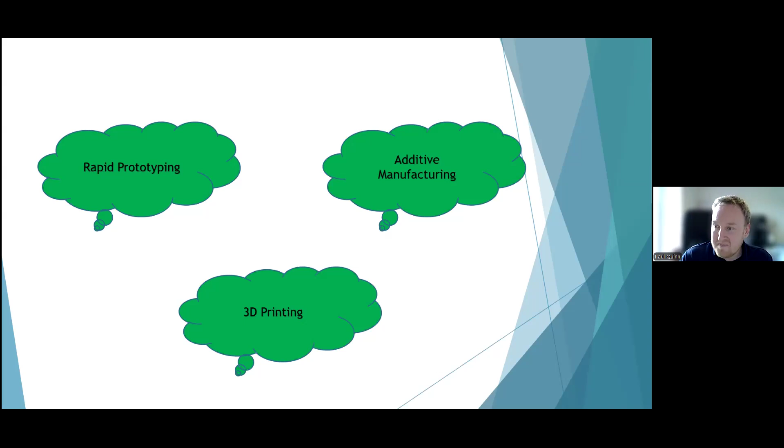I recently did a course on digital education using different tools, and I asked a few different AIs to come up with an image that describes those three things and how they intersect and come across. I thought it was quite fun to put into the presentation today.

So you can see a rapid prototype there - it was all about speed of iteration, getting designs out quickly, having people talk about designs and changing over and over again, generally low volume testing, form, fit, function, that sort of stuff.

3D printing then - were prototyping tools, and these were the tools that we were actually going about. And then our additive manufacturing generally was our industrial side of stuff, so big industry using it, or we have production lines, or we have production facilities ready to roll and bring forward.

Over the last few years, particularly in the last 5 or 6 years, there's been a massive boom. The likes of COVID and stuff like that really opened up the space and people got more interested.

I have students now that come into me in first year, day one, and they're going, oh, I have a 3D printer. And you're kind of like, okay, well, we're not covering that now for a while, but yeah, that's brilliant. So they're already thinking about it, they're already involved, they're already being aware of this sort of stuff. It's a really big benefit to most people, especially getting them to think in an engineering mindset.

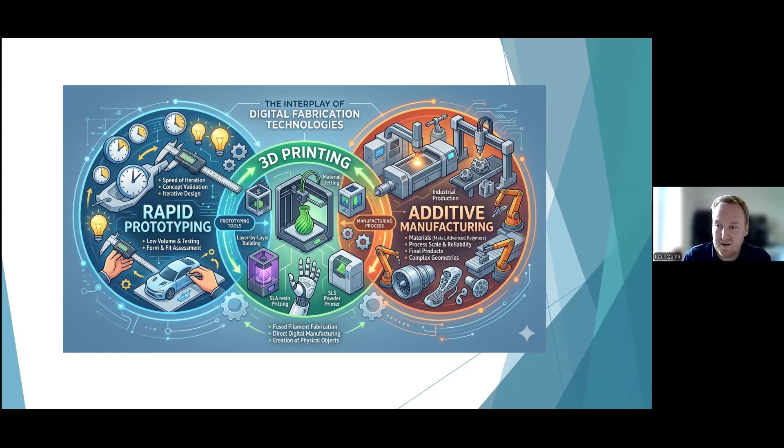So what is additive manufacturing? It's a manufacturing process that creates 3D objects by depositing materials such as polymers, metals, ceramics, layer by layer, based on our digital CAD models.

We take the CAD model, we break it down into slices or chunks, we then put that into a machine, it interprets those chunks, and then produces our object. We currently have 7 different process categories, with different processes within each of those categories, and we have a large range of materials from polymers, metals, and ceramics.

In my last role, it became a bit of a joke that I kept saying materials unlock our applications. As we look to get more and more applications for this technology, we need to have a material suite that follows with that as well.

It's all well and good me going after a certain application, a bracket, or whatever the case may be, but if I don't have the material there to actually produce or make that part, it's no good to me at all. So it becomes really important.

We're seeing with our process technologies - whether it's FDM, SLA, or SLS - generally the technology is improving in small increments, but our material space is blowing up massively. That's where we're starting to see the big benefits now, in terms of people going, well, now I have a material that I can compare with.

Generally, the phrase that the process leverages design freedom to create traditionally difficult to manufacture parts is thrown out there. So parts that our traditional manufacturing process - injection molding or subtractive machining - maybe had constraints with, or we couldn't produce all the features, additive tends to allow us to unlock them a little bit more.

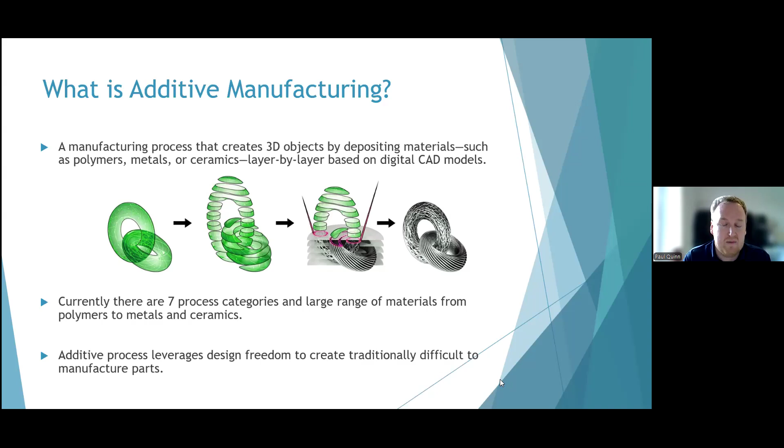So this is our additive process, generally referred to as having 5 steps. We have a CAD file that comes out of SolidWorks, Fusion, Siemens NX, or whatever CAD software you're using. We produce a mesh file that passes into our machine software where we assign our parameters - temperatures, laser power, layer heights, all these settings, similar to running a CNC machine where you'd put in feeds and speeds. We then pass this machine-ready file off to our machine and it prints.

For the first 10 minutes, we're fixated on it and we watch it. After a couple of years, that fixation becomes a little boring, but it's still nice to see at the start. What you can guarantee is the second you walk away is when something will go wrong. But anyway, that's by the by for the process.

And then we get our final part. What a lot of people don't talk about is the post-processing that's required. When you look to buy one of these technologies, no one will ever talk about this - the part comes off the machine and you have to do all this stuff. What they normally say is the part comes off the machine and off you go, you're good. But that's a bit of a scam, let's say. Every 3D printed part that comes off will need some form of post-processing. It's important that we own up to that, especially when companies or industries are looking to adopt it.

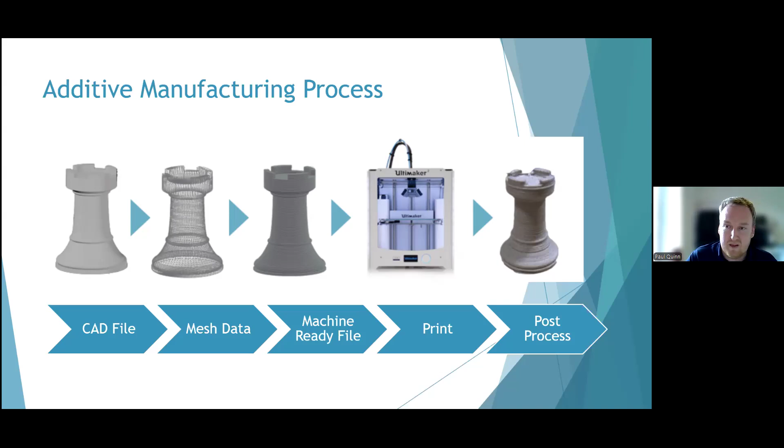Design freedom - a very, very dangerous statement, because once you say this, people go off and design all these weird and wonderful things, and they come back and say 'I'd like to print this,' and you have to say 'actually, no, I can't do that in that way, I have to look at it this way, or change things around a little bit.' I see it with my students every day. They come up with fantastic stuff, and then 'oh, well, we can't print that, or we have to do this to get it to print.'

So we certainly have a lot more freedom compared to how we would traditionally design. We're able to use more complex geometries, do stuff like part consolidation, where we take an assembly and minimize or reduce the number of parts in that whole assembly, integrating functions in certain components. We can look at lightweighting - we can put material exactly where it's needed, and use different tools to help us get a little bit more out of the technology.

So we're starting to see more benefit over just machining - if I 3D printed it in this way, I'd be able to reduce my material use by a certain amount and see the benefits there as well. We can use conformal cooling for injection molding tools to get higher output and throughput, having cooling channels that run very close to the mold surfaces. One of the big benefits is we can start to move towards mass customization - instead of purchasing something in a small, medium, or large, you could get something customized exactly to you. Certain industries have been doing this for a long time.

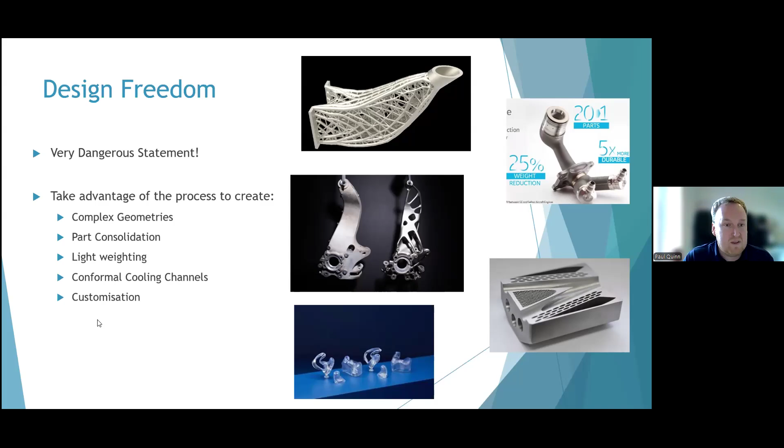So that's where we're starting to hopefully move. There's all sorts of issues we can talk about and explain, but that's where we're starting to see the technology grow and push forwards.

When I was in my previous role, doing consultancy on this sort of stuff, I'm looking at it from the point of view of when we're designing components or looking at a part that might suit being additively manufactured, we tend to put them into three brackets.

So the only real freedom we have there is the process we use. We can maybe change to a different process, moving away from one additive process to another. We don't like to make many of these because we're not really using the technology for what it's there for. It was already manufactured the traditional way, and it worked perfectly fine that way, so why would we drop it in that case?

If we have the ability to adapt it for AM, or additive manufacturing, we can start making tweaks and changes to make it a little bit more suited to our process, so it fits into that process bracket a little bit more. We're not changing our functionality or how it fits, but we might make small design tweaks to get it to sit into that bracket. It means that when it goes to be printed, our process is more suited to the end application.

Then the last bracket, and we love this one, this is an additive engineer's dream, is to be able to design something for additive manufacturing. So looking at a part and going, it has to be able to do X, Y, and Z. Now I'm going to go off and design something that does X, Y, and Z. It might not look anything like what we originally had. We can start to look at the functionality of it - can we improve it? Can we get a bit more efficiency out of the object?

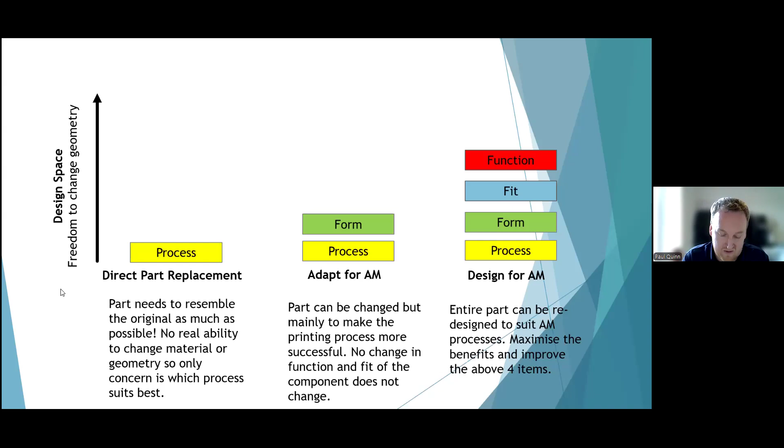So you can see there's an example of a hydraulic manifold. You have your traditional one, a big block with holes drilled through it, perfectly fine - we could reproduce that, no problem at all. Are we gaining any benefit from that? Probably not. As we move on, we might be able to remove material and just print the channels, with little support structures holding in between. So we're starting to see, okay, we're getting a bit more benefit out of it.

We've changed our form ever so slightly, but realistically our function and our fit haven't been adjusted at all. But if I know what pressures I'm trying to maintain, where I need that fluid to go, where it needs to join up with, I can look at completely redesigning it with different internal channels that direct different pressures and get different fluid paths. So I can really take advantage of my process and technology when I go into that space.

This is where we want to be with additive manufacturing. The problem is these are very hard to come by. It's very rare you go into a company or an industry and they say, you can do whatever you want.

Normally they'll say we have a set of parameters here, and if you want to go changing this, you need to do this. So it's hard to come across these sort of examples, but they do exist, and we, as engineers, are able to leverage the design space a little bit more on that.

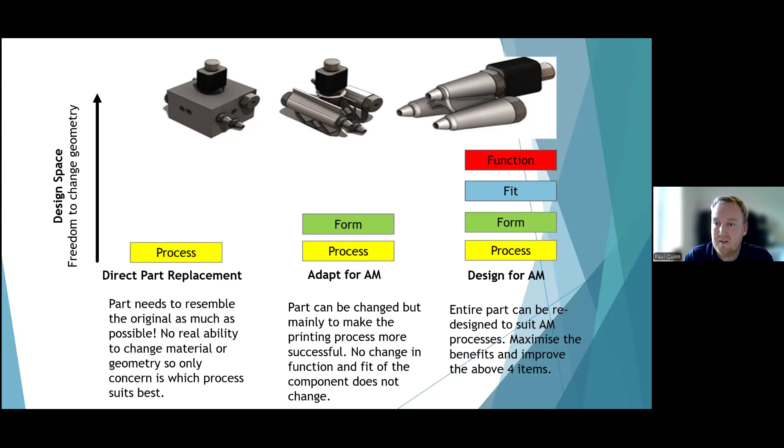In terms of how far additive has grown, the 2025 market was worth approximately 30.5 billion US dollars. It's expected to grow by $7 billion by the end of 2026, and it's projected that the market will be approximately 170 billion by 2033.

Why is it growing? We're starting to see with the technology - and this is true for the last 4 or 5 years - we've moved from prototyping machines, so tools that we have on our desk, like the small desktop machine behind me that's in the house, that people are making prototypes with. It was the same within the workforce: people had 3D printers to make a prototype to see, yeah, it works or it doesn't work.

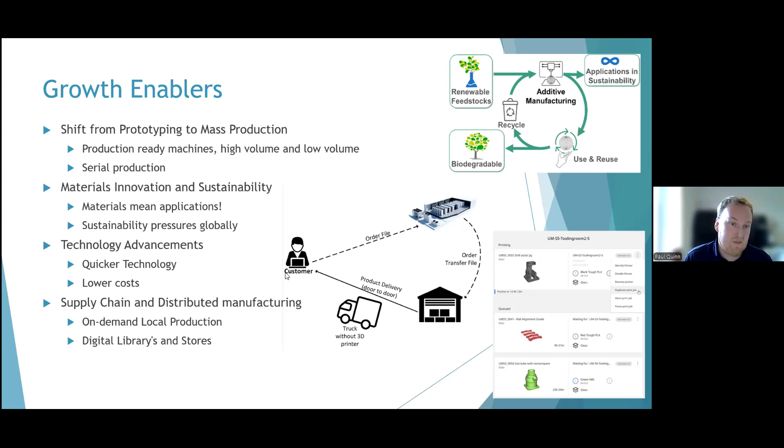Ireland's growth then - we're quite a big global leader in terms of additive manufacturing applications, and we've quite a big market ourselves in Ireland. In 2024, it was estimated to be about 1.2 billion, and we're expecting that to grow to about 6 billion US dollars by 2032. So quite a big growth level there. We're slightly above the global additive rates when you look at it country by country, and it's in the industrial space that we're growing.

We have industries within Ireland using this technology to produce end-use customer parts for different applications. Generally Ireland's known for its high-value manufacturing industries, medical devices, healthcare, and we've also got quite a strong national infrastructure that supports this - research centres like IMR, Irish Manufacturing Research, and I-Form. They're there to assist companies, get them off the ground, and de-risk these technologies to hopefully make it a little bit more successful.

The picture you see there of the house, that's up in Dundalk - that's Ireland's first 3D printed house, and it's debatably one of the first in the world to be printed. These are now offices for people, but they did print a series of three houses that went to a social housing project up there by a company, so they have people living in them. They are useful, and it maybe starts to address some of the issues we're seeing with the housing crisis. We're able to pull this technology in, hopefully for the better good, and make a bit of an advantage there.

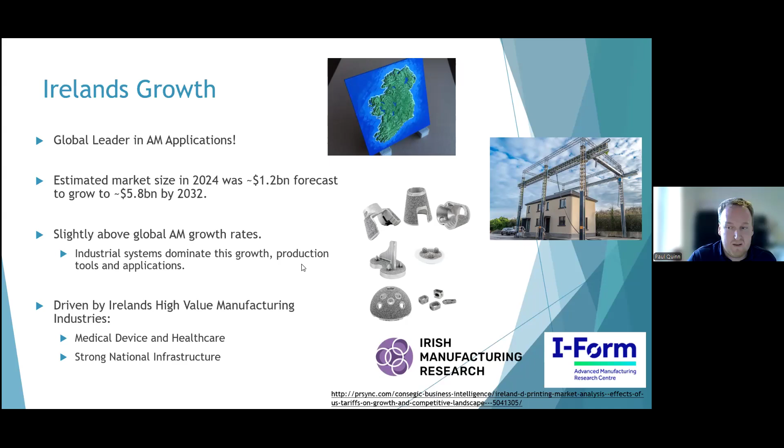I think it's important that we look at how AI is affecting this whole thing, because we see it everywhere and most people are using it or taking advantage of it where they can. Additive has been using it to a degree for quite a while - we have a process called generative design where we take a series of inputs like load conditions, material properties, manufacturing processes, and hand off this information to an AI and a set of algorithms, and it produces designs that meet that criteria. This really opens up our design space - instead of an engineer producing one, two, three designs, they're able to produce hundreds of different designs that are validated to meet the requirements.

We'll start to see AI being used in closed loop process control to try and minimize part-to-part variability. When we get this sort of stuff figured out, it'll open up the space even further, and then simplify how we qualify different components - having all this data and information to show that this part was produced the same as every other part we've produced.

One of the big areas that's certainly going to open up with additive is autonomous additive manufacturing - you give some sort of AI bot or system an intent, what you're looking for, and it goes off and does the rest and produces a component for you. A little bit scary, but we can see massive areas where that could be useful for us, especially when we're able to design or explain or detail out how we expect something to be designed or function, and then let the AI do what it's good at.

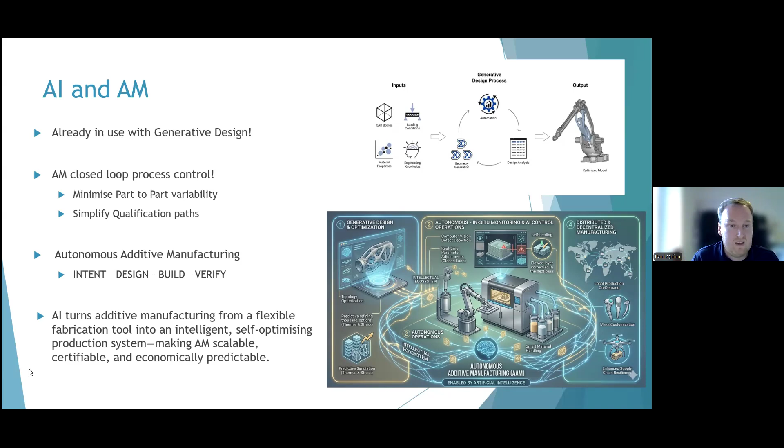The application space in Ireland is huge right now, with a massive range of different applications. We have medical device companies around Cork, Galway, Limerick and Tipperary using this technology to produce implants and components for specific patients. They're the high value users who've invested time to understand what the technology can and can't do, and they have a streamlined process around that.

But when companies are coming in trying to figure out what they can use this for, we generally try to hit the low-hanging fruit. Jigs, fixtures, tooling and similar components are easy to 3D print and would be quite expensive to manufacture elsewhere, because if you go to a manufacturing shop and ask for just one of something, your price is huge. So you can take advantage of those small economies and get people thinking about making these little designs and tweaks.

Often the barrier to continuously improving or making changes is having an idea but not knowing how to make it. If you have a printer there with your engineers or design team, it becomes really easy for them to just offload it. What we often see is a company gets a printer in with a team of five engineers, then suddenly they need two, then three, because everyone's trying to use it. Whether they're printing something for work or for home is a different story altogether.

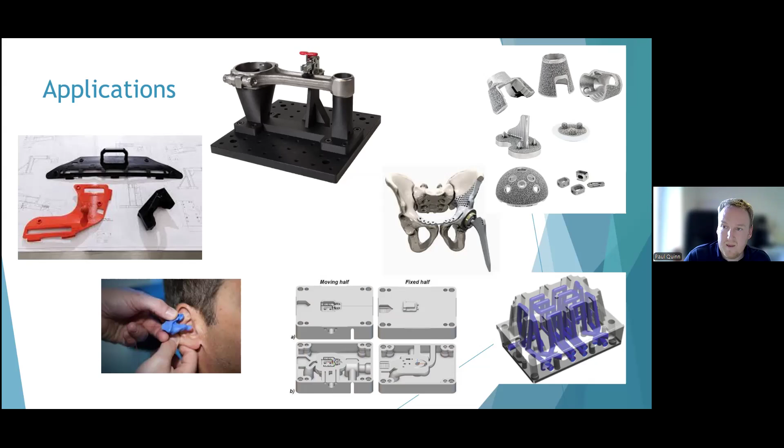Our limitations to growth include high capital costs. If you want to get started at home, it's not that hard, you can pick up a printer for a couple hundred to a thousand euro and print basic plastics with no issues. But for industry, printing metal components means high capital costs, and it's not just the cost of the 3D printer itself. It's all the supporting equipment around it: heat treatment, surface finishing, gas supply, all this stuff that builds up. So there's quite a large barrier there at the moment.

Post-processing is another issue. As I said at the start, people don't understand that we still have to post-process these parts. The surface roughness on a 3D printed part isn't fantastic, so we're normally trying to improve that, especially on a metal component. And our mechanical properties have a high degree of anisotropy, different material strengths in different orientations, and we have to address that, have a way of dealing with it.

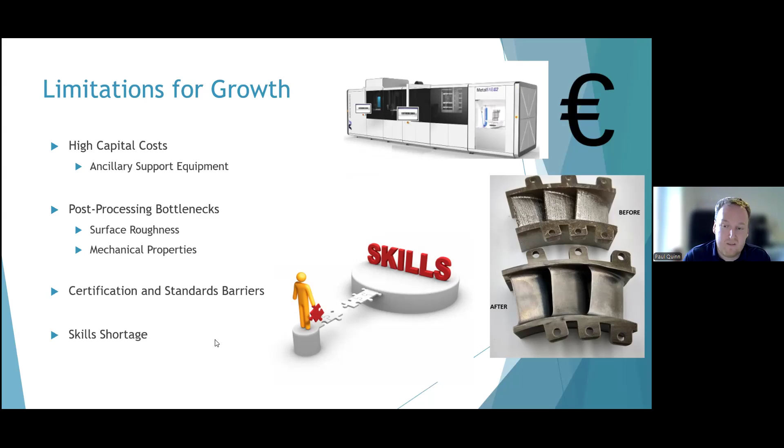We have certification and standards barriers too, which I'll pass on to Barry to talk more about in a couple of minutes. This is a big barrier because people say, well if I make my part machined and I'm able to certify and qualify that part, do I have a comparable way to do that with my 3D printed part or process? And then a big one is the skills shortage. We have quite a highly skilled workforce in Ireland, but it's very small compared to the need we have to produce, and we're lacking certain skills in certain areas. So this is the AM workforce of the future.

This is what someone that wants to work in this area needs to have. It all comes back to understanding the additive manufacturing process, the different materials, how it works, how to design for it.

And then it's okay to not use 3D printing. There are plenty of industries out there where we've gone in and said you don't have anything here that we can really leverage from a 3D printing point of view, so we need to step aside and go back to how you were getting that made. That's perfectly fine. But the worst thing is you could take a part that should be injection molded and start to 3D print it. Unless there's a big benefit there, you're just fooling everybody.

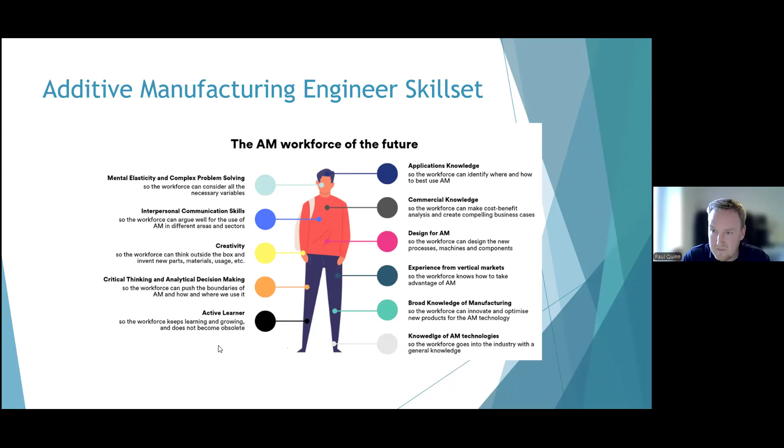As mentioned earlier, in September we held our first national competition for additive manufacturing in the RDS, which was a great success. We had five competitors compete over 3 days in a series of additive-related tasks - CAD, designing for additive manufacturing, 3D scanning components, printing components, post-processing, and more.

We were lucky to receive - only in the last 15 days we got the approval - that we're actually going to Shanghai 2026. Our winner, Harry Green from TU Dublin, and myself will go over to Shanghai in September to compete on the world stage.

We'll be competing against countries across the world over 5 or 6 days at a fairly large scale. The RDS had about 6,000 people through the doors over the 3 days. In Shanghai, they're expecting 24,000 people through the door every day for 5 days - a different scale altogether, but we'll get there.

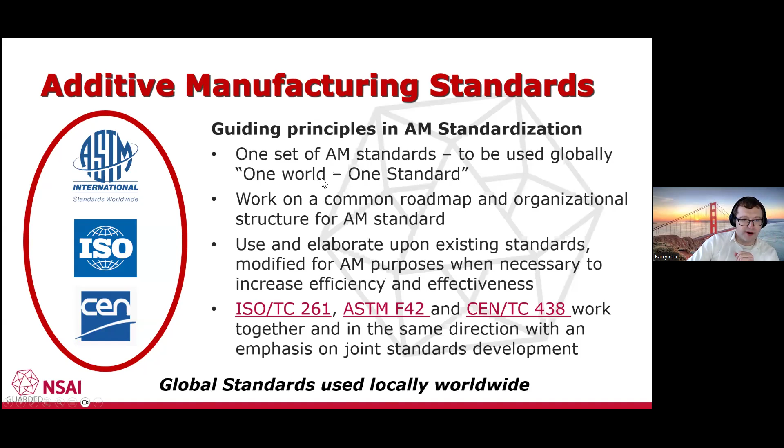Now, where do standards fit into the likes of Paul and his research and all of his cutting edge and cool stuff he does? Well, we have the likes of Paul on the committee, and he's looking at all these standards, using that knowledge, because you have top experts from a lot of the world's top additive manufacturing companies. They're flying off to some nice countries around the world because it's international standards development. They never get to see anything nice. They're put in the basement under the neon lights, and they have to come together and write a standard.

So these lads are there, putting all their knowledge in. Some of them are 30, even 40 years in the business. They're writing these standards, and then Paul can come along, he can read it, he can use it, and then he can say, you know what, this line needs to be changed. This isn't clear. This is how I used it. This is a way to make it better. And this is how Ireland is having an impact on these global standards, with the likes of Paul commenting and giving his more, well, I'd say 2 cents, but it's more than 2 cents that Paul gives.

And that's helped building trust, and it's helping get from a low technology readiness level out there to mass market, to just giving the quality, the standard for post processing, having that in the tender, having that in the product description, and that's giving new companies confidence in the product at the end of the day. And that's how standards help move from a low TRL to a high TRL, and why standards help bridge the gap between the research and the market.

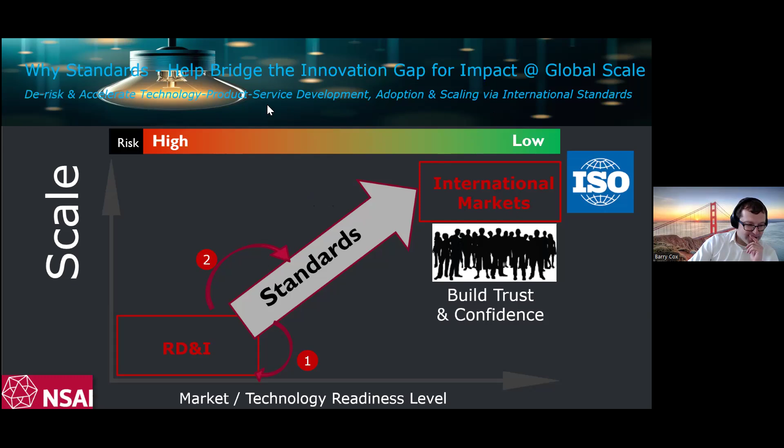Now, national AM standards. We do have national additive manufacturing standards, but they're adopted. So what happens is these joint groups, these experts in the hotels under the neon lights, they develop the standard and then they get adopted, so it becomes an EN ISO. And then Ireland adopts it and becomes an I.S. EN ISO. Okay, so you look at it and it comes like this: ISO

52941, and will cost you up to €100. It gets adopted then as a European standard, and then it gets adopted as an Irish standard, and it's half the price because we are funded by the government. The government has recognized the power of these standards, so we don't need to make a profit from standards or cover our overheads. We just pay ISO the royalty, it covers it. And that's how we can give you the additive manufacturing standards at a reduced price.

So I think in a former life I was a car salesman, and that's why I'm doing the sales piece.

So there we go. Now we come to ISO TC 261. At an international organization of standards level, they have technical committees for everything. So this is the 261 committee created, and it's for additive manufacturing. The secretary is from Germany. They have published 54 standards since the committee started, and there are 15 standards under development, and there are 29 P members, participating members, which are countries participating in the development of these standards, and Ireland is one of them.

And when it comes to voting, there are different stages that it goes through. There are 6 stages. We have the same voting rights as China and as America, and our voice is heard in giving that value that it deserves, which I think is brilliant.

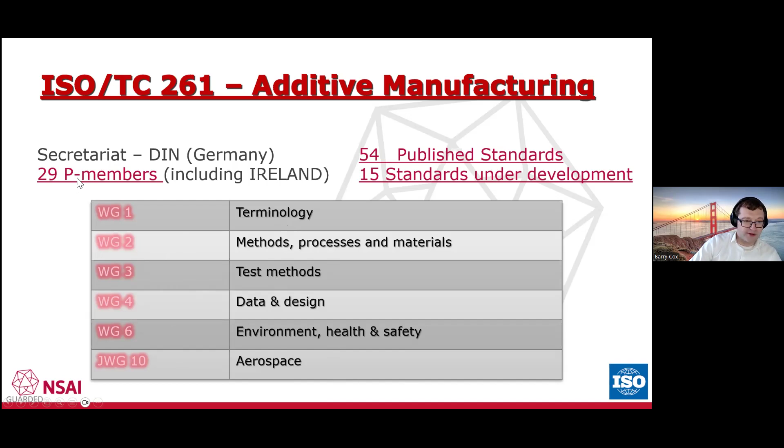So it starts off at ISO and ASTM because they're joint standards. American and ISO get together. You have the working groups, and then you have the joint groups between ISO and ASTM, and they go off and develop the standards.

Everything is hyperlinked. So I'm going to make these standards available after, because it was painstaking to go through and hyperlink everything. So you can click on all of them and see the numbers and read abstracts.

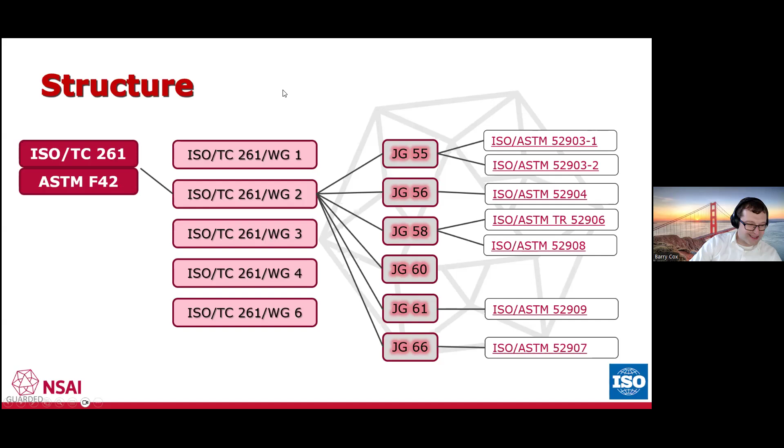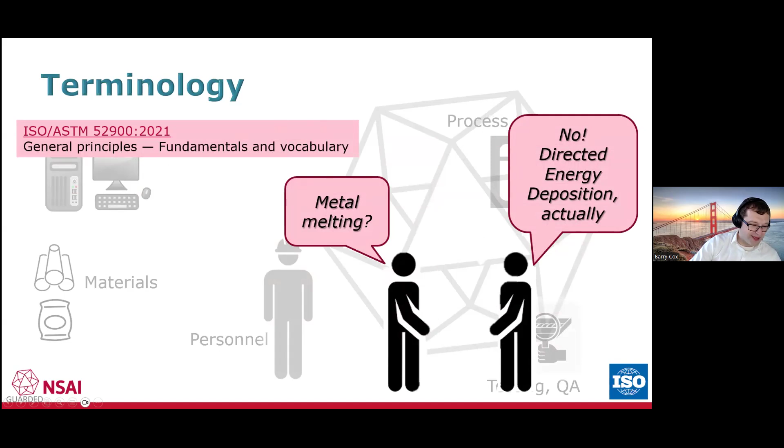Now, terminology, I think this is very important, especially for trade. You want everyone talking the same language these days. So general principles, fundamentals, and vocabulary. For any new technology, I think it's very important that you look at the vocabulary and the fundamentals, so that when you're buying something, you don't say metal melting and get something else. They know that, no, it's directed energy deposition, actually. Sounds far more cooler. And then we move on.

So I'm going to go through the different standards in additive manufacturing. I'm going to go to data and design, and then we'll cover processes, we'll go through materials, we'll go through personnel, and then we'll go to testing and QA. So let's start off first of all with data and design.

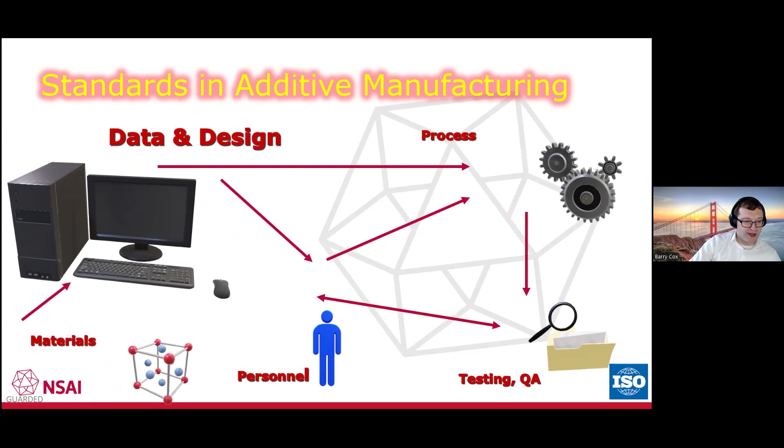So we have TR as a technical report. This is back in 2020. So ISO ASTM developed the standard. We have its full standard, the number, and then the year it was published. So we have standards for design, functionally graded additive manufacturing, requirements, guidelines, and recommendations.

So if you click on any of these, and I'll click it there, something will happen in the background - yes, it is safe. So it'll open in the background, and we'll go to registration of data acquired from process monitoring and for quality control.

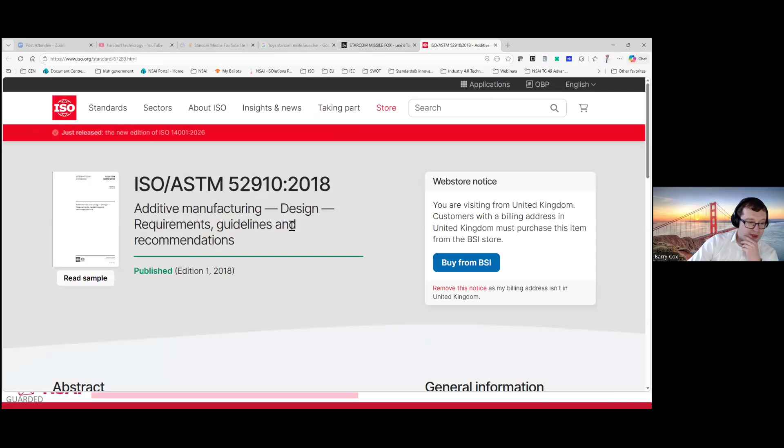So when you get to the slides, you can click on any of these hyperlinks. It'll bring you to the ISO site, where it gives you the title of it. It also gives the abstract, so you can see what it's applicable to, what it does. You can come down and see the stage that's published, in 2018. I can see the number of editions, number of pages, technical committee, and so on and so forth. And then you go to the NSAI site and buy it - don't buy it from myself. So yeah, everything is hyperlinked for you.

We have design part 1, laser-based powder bed fusion of metals. We have specification for additive manufacturing file format. We have overview of data processing. We have design of metallic materials, laser-based powder bed fusion of polymers, because Paul talked about all the different materials - you have polymers, ceramics, metals. We even have data optimized medical imaging data. You have a lot there. So that's just data and design.

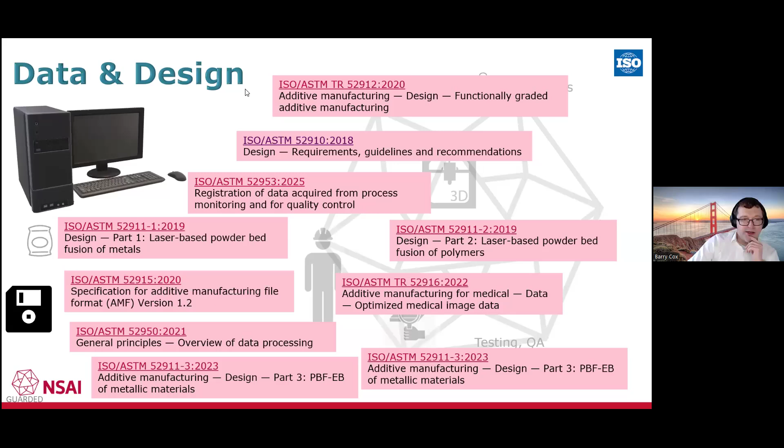And then we move through to materials. So we have additive manufacturing of metals, environmental health and safety, general principles for use - that is quite important. We have material extrusion-based additive manufacturing of plastic feedstock materials, powder life cycle management, which is very, very important because if it's there for so long and it absorbs the moisture, you're not going to get that really good finish and good strong part that you wanted.

You have additive manufacturing of plastic materials, process equipment. We have measured metal characteristics, methods to characterize metal powders, feedstock materials, qualification of materials for laser-based powder bed fusion of parts. So again, all these for all the different materials.

And again, you can look at these, click on the links, you can read the abstract. If you're a researcher, if you're working in the field, you can see is this applicable for you. Is this something that you can put either in a tender if you're buying something, or is it something you're going to use and put on the product, or say as a sales point that it is to an ISO standard, you are using it. You're following all the shall statements in it, and using that standard. So it gives the end user that bit more confidence in the end product.

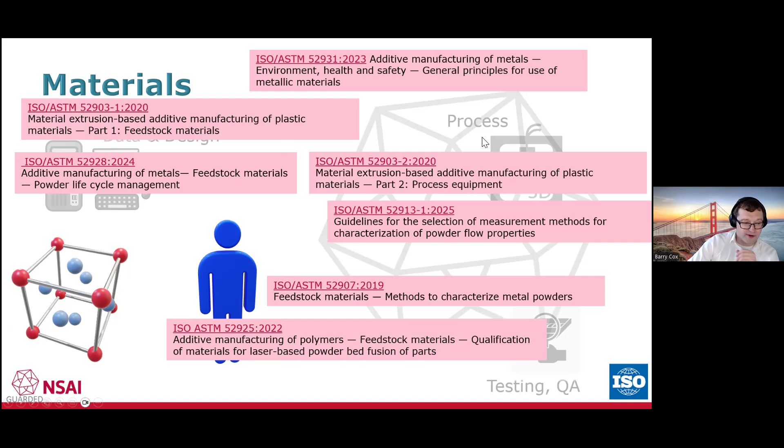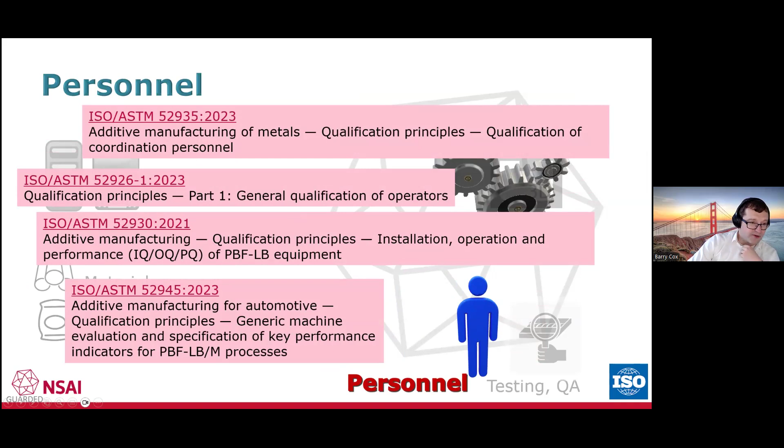And they'll move on to personnel. So like that, there's qualification principles of coordination personnel, general qualification of operators, installation, operation performance, additive manufacturing for automotive qualification principles, generic machine. And then we come to the processing.

So part two, processing of equipment, directed energy deposition using wire and arc, process characteristics and performance. We have acceptance tests for laser, metal, powder bed fusion machines for metal materials for aerospace applications. So even though you're not sending it into space, maybe it's something as well you can put on to show how strong the part is. If you're going to use it, process characteristic and performance, metal powder bed fusion, process to meet critical applications.

So again, Paul was saying about printing it and using it, and we're going to come to applications. This can be used in critical applications as well, which is absolutely amazing. And then you have qualification principles requirements for industrial additive manufacturing processes and production sites. So again, if you have that standard as well and you're using it, it just gives the end user that bit of confidence in the end product.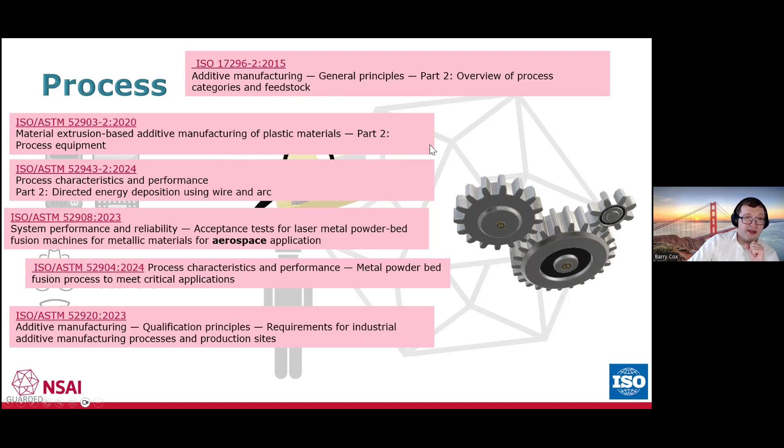So that's processes. And then there's one going back to 2015 for overview of process categories and feedstock, and that was just recently confirmed again. It's an oldie, but it's a goodie, just like me. And then we have testing and inspection.

So we have TR, technical reports, non-destructive testing and evaluation, defect detection in parts. Really, really good if you're just going to be printing off one part and doing a batch of them. You can go in and make sure testing and evaluation, there's no defects in the parts.

We have test methods for determination of particle and chemical emission rates from desktop material extrusion 3D printers. Very important, and there are other ones coming down the line, harmonized standards with the machinery directive for that safety part as well. Because using all these materials that are fast flowing, you do want to take into account the chemical emission rates, especially as people have these 3D printers at home, maybe in small box rooms or bedrooms. So the standards are there to help with the risk and manage it.

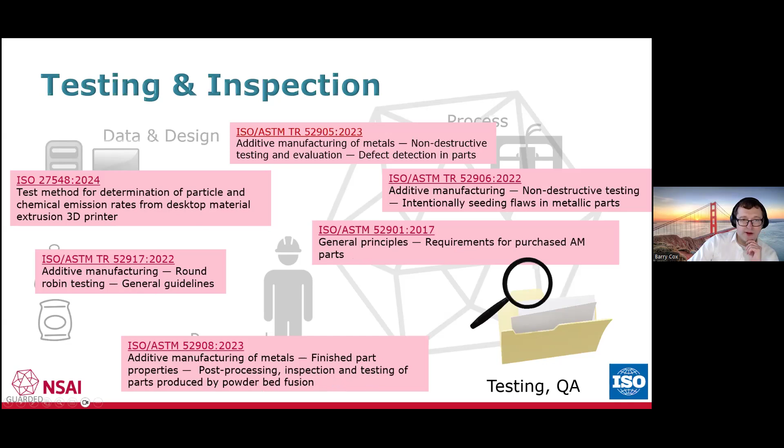You have additive manufacturing round-robin testing, general guidelines. We have finished part properties, post-processing inspection and testing of parts produced by powder bed fusion, requirements for purchased AM parts - again, an oldie but a goodie. And that is the testing and inspection.

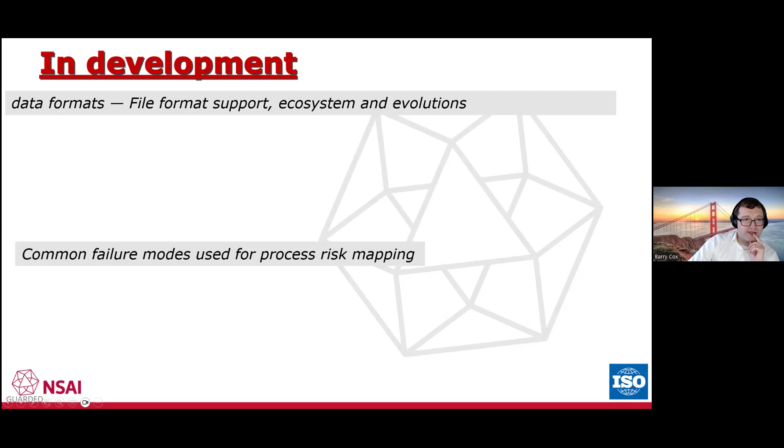So what is happening with these standards in development? There's about 15 in development at the moment. We have data formats, file format supports, ecosystems and evolutions. We have common failure modes used for process risk mapping. We have classification of imperfections in DED parts. We have data capturing and structure for PBF-LB machine logs. We have design, directed energy deposition of metals.

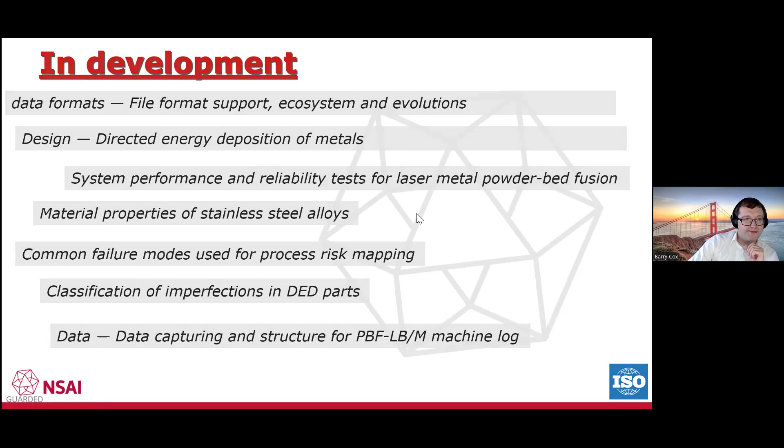Now just to say about the cutting edge research that Paul does and the impact it's having on people: Atlantic Prosthetic and Orthotic Services and Irish Manufacturing Research collaborated to develop a digital workflow for computer-aided design and additive manufacturing for transtibial - from the knee down - prosthetic sockets from scanned patient data.

Because when they did the scanning, you're either size 3 or 4. If you were 3.5, you'd have to wrap it, and you're not giving the patient a good quality of life. So this I think is groundbreaking - from a scan they can give a patient a matched device, and they use standards in order to give that quality, give that oversight to the clinician who can sign it off. That's absolutely brilliant, and it's improving people's lives, giving them a better fit and a better quality of life.

So in this collaboration, the standards - management systems, manufacturing specifications, test methods, product specifications, all the core standards - were all leveraged to develop a body of evidence that allowed the clinician to sign off.

So you have the overview of data processing, where the standard supported identification of best practice for data handling. You had the geometric accuracy of a manufacturing process, where the standard supported qualification of machines used to build test coupons and products. And you had the general requirements of AM parts.

And there are other applications as well that may be good. So where is it here... As a kid, I got this on Christmas, the Starcom missile launcher, which I thought was cool. I found it in the attic the other day, but I'd lost that missile launcher, probably on Christmas Day - the little red missile - and put the toy away.

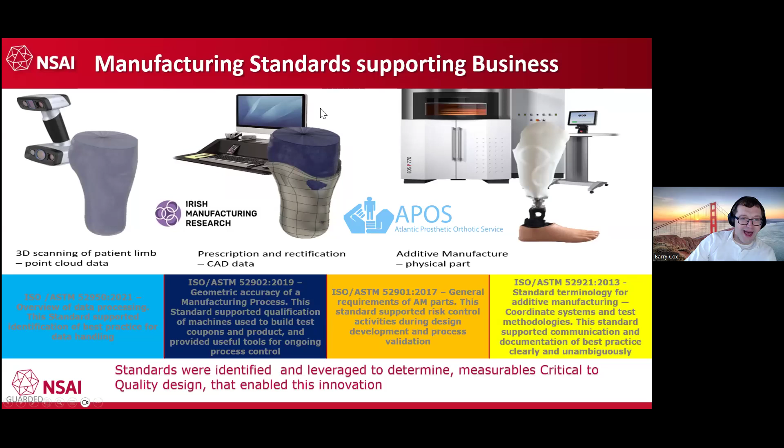So again, I'm talking about the EN ISO versus the BS, the British standards. So there you go, 36 plus VAT, and then the BSI 134. So this is the car salesman coming out of me.

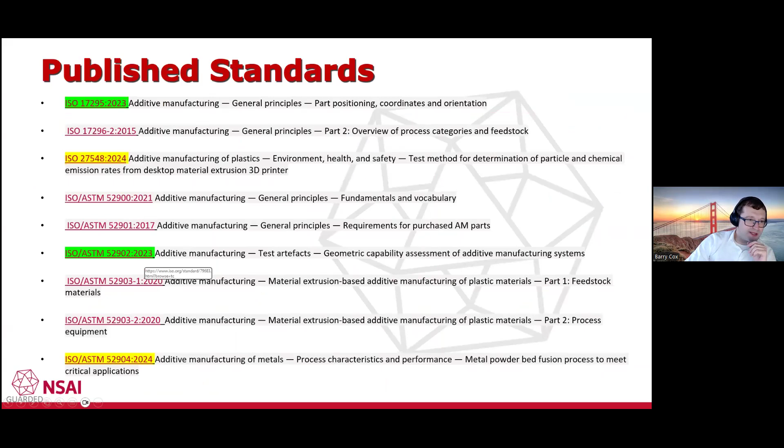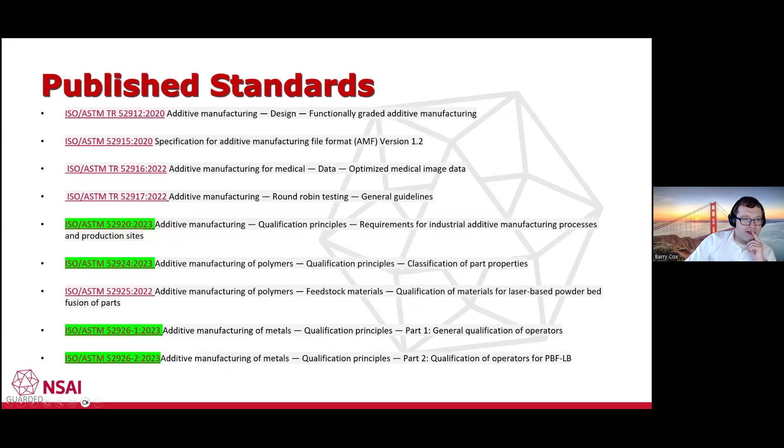Okay, and then we have published standards. There are a lot of published standards. Again, everything is hyperlinked, even color coded. We have green for 23, gray for 2015, 17, and 20, and the old ones, and green again for 2023. It's all linked there, you can see it. There's more published standards. I'm not going to read through them all. They're all linked, the slides are going to be available. Go through them all and more.

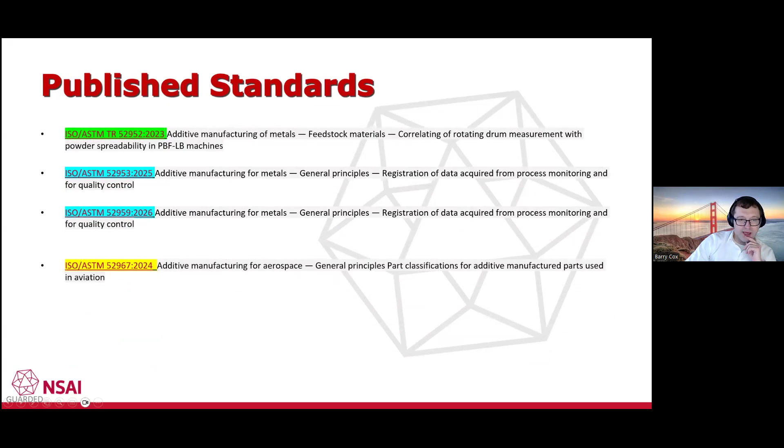And the last page, thank God. For 2026, we have the general principles for registration of data acquired from process monitoring for quality control. So 2026, this is really important. You might see it, you might need it. All the standards are there. Click on the link, read the abstract, and then buy it from the NSAI store. Resources.

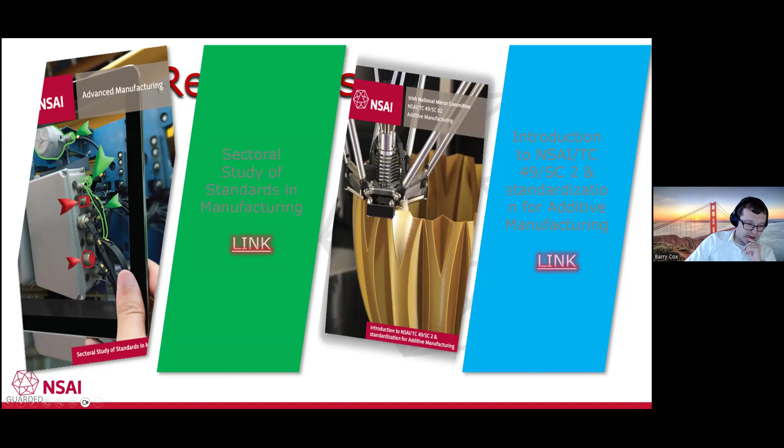On the NSAI website, we have got a sectoral study of standards in manufacturing. You can click on the link. It is a bit old now, it was done during COVID. And we have an introduction document as well to NSAI TC49 SC2 for additive manufacturing. Again, it is a bit old, but there is information in there going through the processes, how they're created, the different working groups, the joint groups, even some of the standards that were being developed a year or two ago. You can read on it. So that is for you.

You can get involved. If you want to get involved in the committee and getting all these draft standards and everything, you sign up. It's voluntary. I never ring you and ask you why you come to a committee meeting, and Paul can vouch for that. If you comment or submit comments on standards, they're anonymized. It's Ireland's comments. If they're accepted by Paul and the colleagues in the committee, they'll go off as Ireland's comments. So the ISO police will not be ringing you at 2 or 3 in the morning. You're safe. Okay, they may be ringing me, but they won't be ringing you. So you can go in and submit comments, and don't be afraid, give yourself a voice, especially if you're a researcher and you're using standards and you feel they need to be improved or used. When the standard's being reviewed every 5 years, you can go on and get involved.

Very powerful. We have an NSAI eZine magazine of all our services, so you can see standards as they develop. You can get nice success stories and articles as well. So in closing, standards are part of your industry. You can see standards as they develop and can be part of the standards as they develop. So you can be part of the solution, which I think is brilliant. And we're here to help.